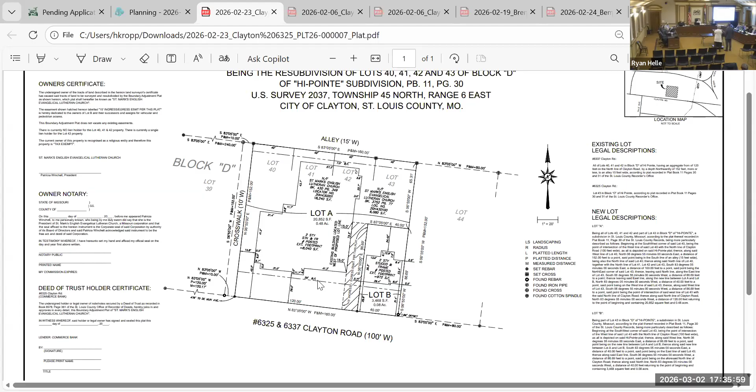Where in the driveway? So that is a very good question. The original plat, you can kind of see that it's laid out into 4 different lots. So the 3 lots would maintain the church and the property line would be right there in the division of lot 3 and 4. So it is more close to the actual residential property. Most of the driveway would be the responsibility of the church.

Okay, so looking at this scale and this reproduction, it was hard to tell exactly where that line is or will be. And the shared driveway agreement mentioned that there was driveway on each side. So thank you for the clarification.

Sounds good to me. Jim? I didn't really have any questions or concerns. I agree with you. I think it's a win-win for everyone, and I can understand why the property would be desirable. Chris? No comments. Blair? Also no comments. Jeff? Same, no comments.

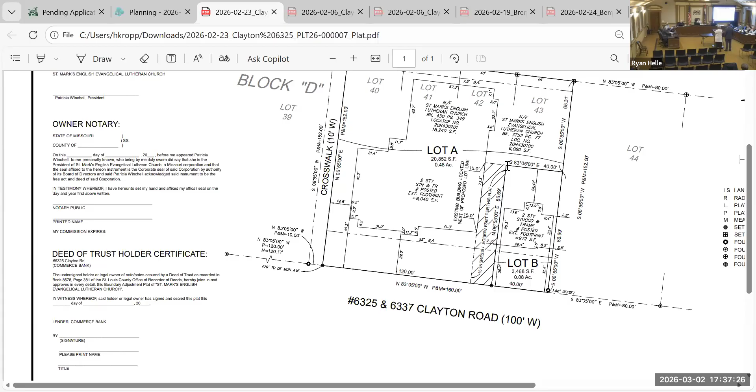Thank you. Okay, I need a motion. Oh, I'm sorry, I have Susan, no concerns, sorry. And also the public, is there anybody here who has a concern or would like to speak to it? And no one online has their hand raised, so no.

Okay, now I need a motion. I move to approve with staff conditions 1, 2, and 3. Second. All in favor? Aye. Aye. Opposed? I assume you have read the staff recommendations and you're agreeable to them. Yes. Okay, thank you, look forward to it.

Next on the agenda is 141 North Brentwood Boulevard, and it's the architectural review for fencing. Is there a representative from the owner? Okay, before you introduce yourself, Hobie.

The subject property is located at the northwest corner of the intersection of Brentwood and Westmoreland. The property is zoned R2, is in the Clayton Gardens Urban Design District, and is developed with a single-family house. The applicant is seeking approval for exterior alterations, including the addition of a new fence located in a front yard. There's an existing patio with a surrounding wall located on the east side of the house in the front yard along Brentwood. The paving would be removed and replaced with grass.

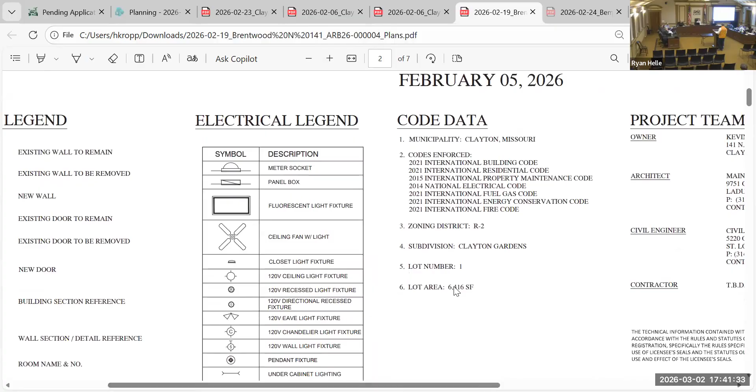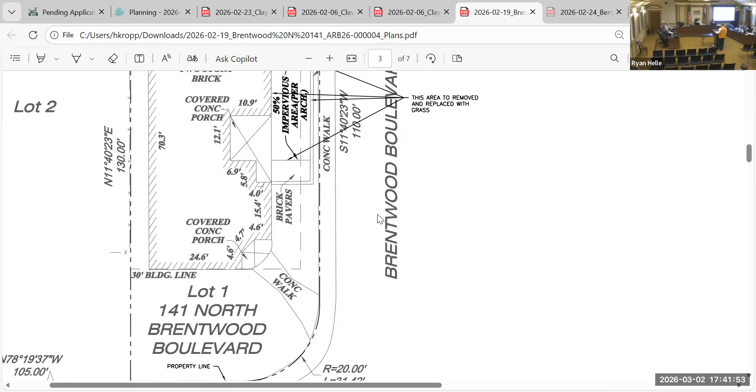Okay, thank you, I like your attention to details. The setback appears to be identical to the masonry wall that exists. And the 1.5 feet, you've maintained that off of the easement, which you can build right up to an easement. You can build on it, but you risk having to remove it if the easement is claimed.

That, and picking up the vocabulary of the neighbor's fence with the brick piers and the wood, I really like that. Will you be able to match the brick of the house? We're going to try our very best. We don't have any samples yet, but we're going to try. Certainly, it's our goal. Okay.

Yeah, it is away from it. It's not right next to it. Right. So you have a little bit of latitude. Right, I mean, it's sort of a pinkish brick. It's not, let's just say it's atypical, but we're going to try our very best. So, okay, Jim? Yeah, I echo Helen's comments and the staff comments that are in the staff report. I think the part that's facing the street is minimal.

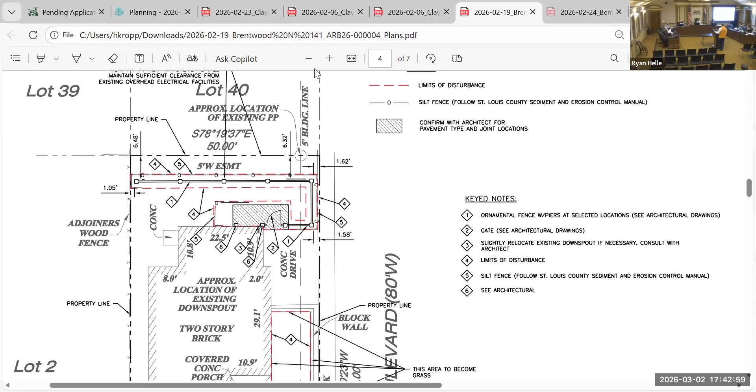And I think it's well done, so I don't have any problems with it. Chris?

So I'm familiar with this. I live in Clayton Gardens, and I'm very familiar with this lot and the work that the owners have done since moving in fairly recently, which is very nice. I couldn't quite visualize.

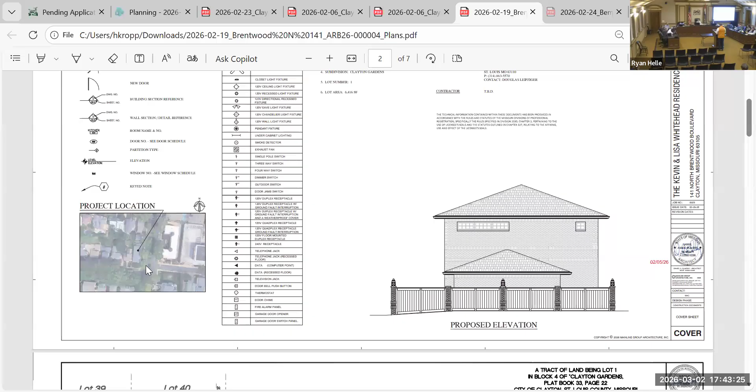They've done some very nice plantings along Brentwood, and it seems like there's the patio area there. What I can't visualize is why they're replacing that section, which seems to come out almost all the way to the sidewalk. We had to be very, very careful with our impervious surface area here.

And the owners hired a civil engineer who was very methodical and very careful about his calculations. And we had to sort of make some sacrifices along the way. And that was one of the sacrifices.

So even the dimensions of the piers and the top of the fence itself, we would have liked something even a little bit more robust, like the neighbor to the north. Their fence is a little bit more substantial, but at the end of the day, everything here is really sort of modified to meet the impervious surface threshold.

Okay. Yeah, I really don't have any concerns with it. I think that they've shown to be good neighbors in a way, in the sense that they've built up the landscaping. So I tend to not really like when you're closing off more with the fences in a walkable sort of neighborhood like Clayton Gardens.

But in this case, I think that there has been a lot of attention paid to the design of it. And I can understand how it would be used as a glorified dog run as such. So I don't have any concerns about it.

I think the owners are planning on doing a fairly nice planting screen in front of the fence, something that's compatible with what they have over at their little entry patio. Okay, so.

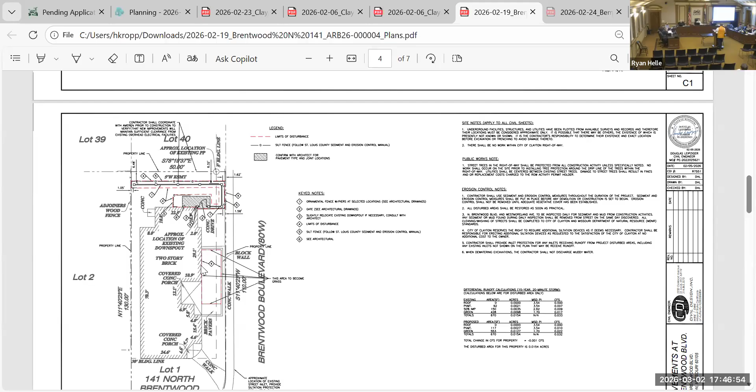That would be my only comment, was that I wish we weren't building that tall a fence that close to the right of way.

Yeah, if you scroll down a little more, I think there's a photo of the neighbor's fence. There, no, the one with the pillars on it, to the north, the neighbor to the north.

Yeah, it's on sheet A 2.1. It's the third exhibit. Yeah, exactly. Drawing 3 on A 2.1.

I think that we're trying to be consistent with that. I mean, there is a power pole that is just in the wrong place. And we wanted to enclose a lot more area than we're applying for here.

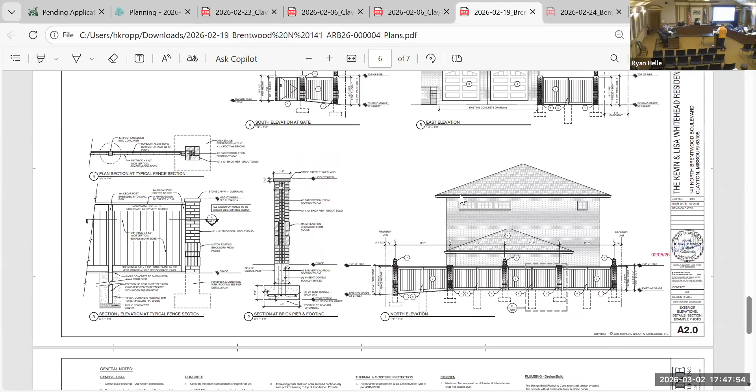The power pole really does limit a lot. And we wanted to avoid building in the easement, and Ameren could come along at any point, which they probably will, and want to do some work on it.

So, but I think that their fence is probably somewhat compatible in terms of the frontage with our proposed new fence. Just so everybody's clear, the fence is so similar it would feel nice as a pair if they were set back the same distance, as opposed to this plan, where it'll come out within about 1.5 feet of the property line, between the power pole and the sidewalk.

It's not a deal breaker, but I wish it was set back a bit. Correct me if I'm wrong, but based on C2, it seemed it was going to be almost even with the existing patio to the south. Yes, it is in front, and it is close - it's a 6 foot fence, not a shorter one, so yes, it is close.

Susan: I would agree with Jeff's comments. It's a tall fence and it's very close to the sidewalk. Having just driven by there - I don't live in the area, but I spend time over there with friends, homecoming parades and things like that - the more walkable our cities can be with sidewalks, and 6 feet that close to the sidewalk did concern me.

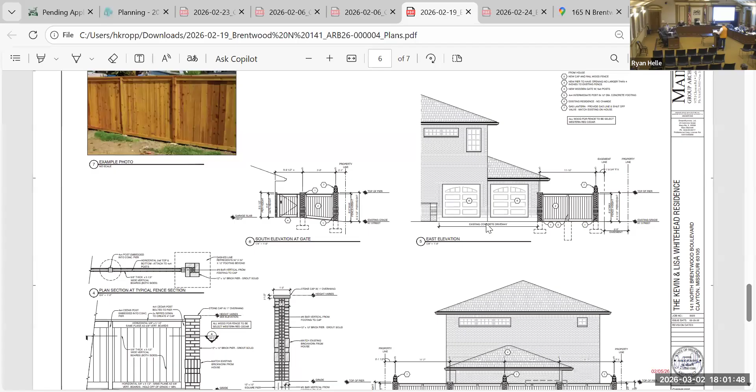I think at this point it's just for a motion as far as whether we approve with changes or continue to a future meeting. It could possibly benefit you if we continue to a future meeting, so you can check the measurements, and we don't put a measurement in that you then go back and lose something. I think largely everyone's on the same page, but since we don't have an exact measurement, that might just preserve the design.

That sounds good, why don't we do that? May I have a motion? I move to continue this to a future meeting agreed upon by the city and the applicant. Second. All in favor? Aye. Opposed? The motion carries.

We will see you when it works for you. When is the next ARB?

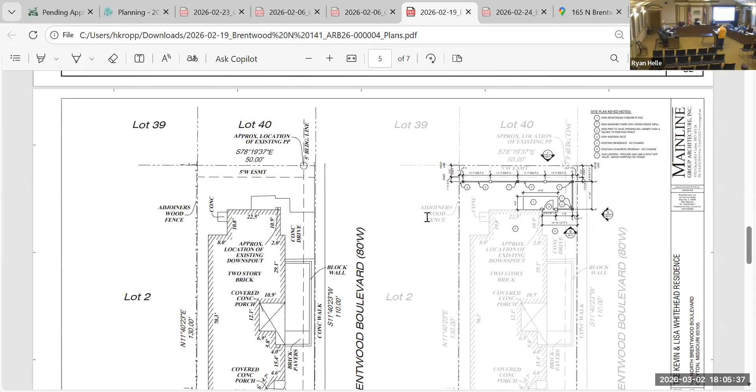Okay, thank you very much. We look forward to seeing you on March 16th, or the following meeting two weeks after that.

Next on the agenda is 224 North Bemiston Avenue, site plan review for an accessory structure. Is there a representative for the project present?

The subject property is on the east side of Bemiston between Pershing and Kingsbury. It's zoned R3 and is developed with a house, duplex, and two detached garages. The property formerly consisted of two parcels approved for consolidation on December 1st, with the condition that the applicant apply to demolish the duplex within six months of council approval. The project consists of demolition of the duplex and northern garage and construction of a residential addition and exterior alterations. The addition would include a garage and sports court connected to the house via a breezeway. A new pool and patio would be located in the rear yard. Surrounding properties include single and multifamily structures. The project would result in lower density than most R3 lots, but meets the requirements of the district.

We are seeking to build an underground sport court. By placing that underground, we are reducing the overall massing that a structure like that would require. Adding a 3-car garage with a link between to make a nice parking court is part of the strategy.

We have our civil engineer online joining us via Zoom if anyone has questions about meeting the right equation for the planting of native species. Our landscape architect, Ted Spade with SWT, has suggested if we just remove one European hornbeam from the count, that puts us at 34 native species, which puts us over the line with a very minor correction that can be caught up with the building application.

Okay, I like what you are proposing, but not seeing the drainage areas concerns me. Could you explain the site drainage, or will Mr. Wagoner do it? I will leave that to Mr. Wagoner.

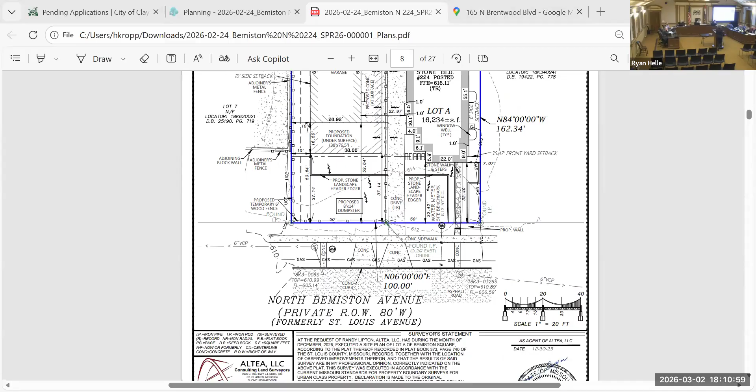Thank you. Looking at the plan, C 1.0, I see 4 pop-up emitters, 2 at the front and 2 at the rear. I'm also wondering if there are any dry wells that will be with those pop-ups. Mr. Wagoner?

Yes, I'm here. Can you hear me? Yes, hi, good evening. I'll start with the existing drainage patterns on the property. I've worked on some drainage area maps, not being presented tonight, but the property does roughly split: about half goes to the rear yard, the other half drains to the front. So the existing drainage patterns don't show runoff running to the sides of the properties toward the neighboring house foundations.

Regarding the structure we're taking down, I understand the downspouts go underground with no outlets daylighting on the property. It's my suspicion those roof drain pipes are routing out to the sanitary line, which was common practice 80, 100 years ago. MSD has indicated that the sanitary main is surcharging, so it's my suspicion those downspout drains are going out to the sanitary main.

As part of our proposed design, we are routing the new roof downspouts as you stated. There are 2 going to the rear yard and 2 routed to the front yard, so we're roughly splitting the roof area between the rear and front yard in an effort to maintain those drainage patterns and keep the property roughly split 50-50.

We're also picking up driveway and surface drainage in a channel drain and routing that out to the front yard, which is the same direction the existing pavement drains in that area. So from our efforts, we're trying to follow the same patterns to route water to the rear yard and to the street as it does today.

Using the pop-up emitters, we're allowing for more infiltration than exists today, with the roof drains likely being connected to the sanitary main. Regarding where water routes out to the street, to the north along North Bemiston there's a curb inlet at the corner, so any street drainage eventually ends up in that curb inlet and then into the storm main.

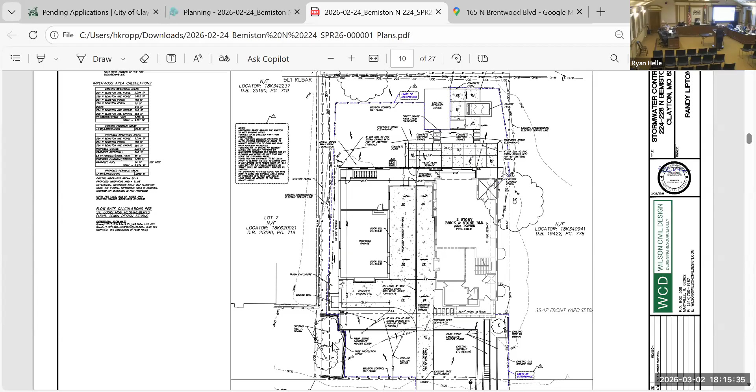There will be a sump in the lower level of the sport court, at the sport court level. I don't know what the groundwater is; we won't know until we open up the earth to see that. Wilson, can you respond to that question? I'm also not aware of the exact groundwater depth, so I'm not able to respond to that specifically.

Can you walk me through where the sump pump connects to and how that directs out?

Susan, where's the location of the sump pump? The sump pump is in the northwest corner, approximately where the cursor will be, inside the sport court area. Does the plan show where that then pipes out to outside the house? No, it does not. That's something I would like to see in the future too, along with the drainage patterns and calculations.

I think all that, just a little more robust data, would help aid us in making a decision.

We have an engineer who has raised her hand whenever that's appropriate.

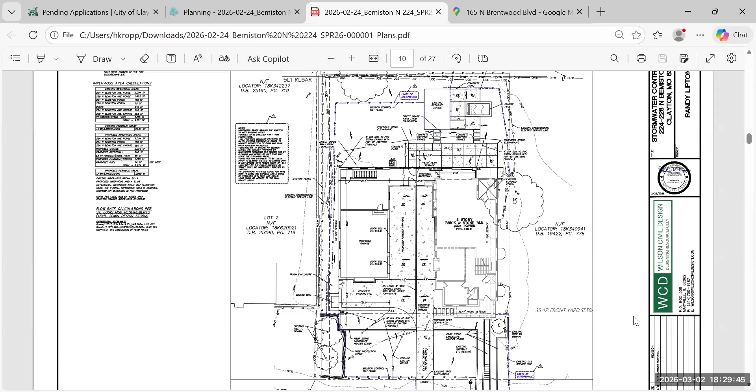This is Wilson. We're releasing the water from the pop-up emitters at least 10 feet back from the sidewalk, so there is a grass area to serve as a buffer. I'm showing 12 and a half feet from the nearest pop-up to the sidewalk.

And will that be enough grass to keep water from ending up on the front sidewalk? Water will run off, not just from pop-up emitters, but grass areas also have runoff. So it's impossible to completely stop water unless you have a berm or some sort of barrier to catch it before it goes across the sidewalk.

So just from the yard in general, there's going to be some surface drainage from the entire front yard that goes across the sidewalk. I've seen numerous occasions where in weather like today, you could end up with ice on the sidewalk - it's kind of a safety issue. We are trying to avoid concentrated flow going to the sidewalk, but like I said, it's not possible unless you have some sort of barrier at the property line.

Which is why I brought up landscape materials. I don't know if there's anything that can be done there with something other than lawn that will help keep the water where it's supposed to be. I'm not a landscape architect, so somebody else will have to answer that, but it'd be nice if we could.

And I think that's all I had from a plan standpoint. Okay, Susan.

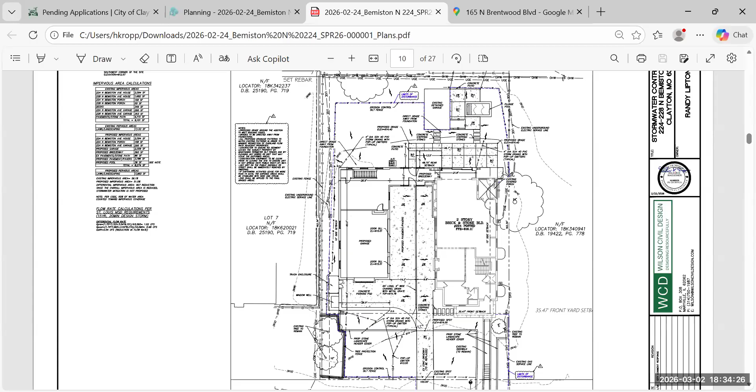I can definitely understand that and see that. But I also think it's going to raise the property value in the subdivision. This is going to be a pretty nice addition to the neighborhood here, so.

Okay, thank you. I think another thing that has just come to light is when you mention the sump pump, we've been concerned with the sump pump and with the depth you're going with the sports court - what is the water table? Maybe on the surface there's less runoff, but will the ground absorb it with that much below grade claimed for a sports court? And yes, the sump pump will work, but is that going to be a constant flow of water to the sidewalk, across the sidewalk, and into the street?

There have been instances on North Bemiston where there has been black ice from a sump pump. It's been corrected, but it existed for a number of years. So I think that's something else that needs to be looked at when you're looking at the drainage, and I think we're going to want to know more about that.

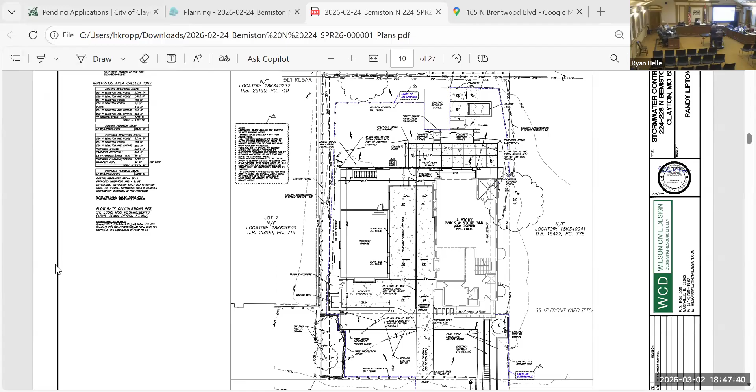Staff recommend approval as submitted. Thank you. Would you like to add anything? We have material samples for your review. Okay, can you hold them up so that we can see them? Or just tilt them?

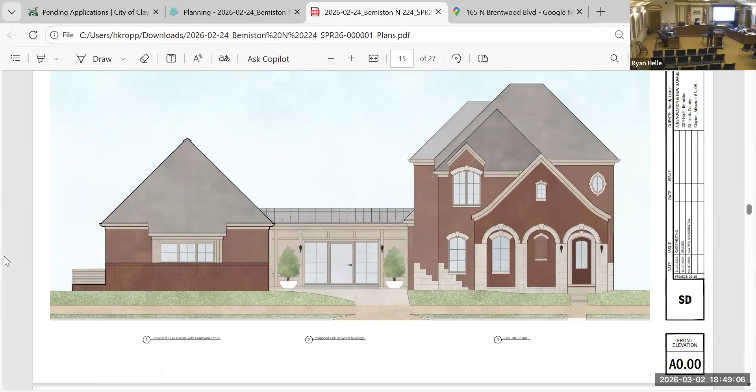Okay, I think, as others have said, you've handled the challenge of a sports court and a garage very well. And I like that you've made use of the existing garage, the one immediately behind the existing house. The roof on the garage - there's a lot of roof, seems really high. My first instinct would be to bring it down, but then looking at it with the existing house, it needs to be that. If it were anything else, it would look, I think, mundane, like a backyard garage. So I think you've met the challenges well.

My only question is, what is the height of the brick wall that is going to hide the open parking space at the front? It's 3 feet. Yes, ma'am, 3 feet. Okay, that concerns me. 3 feet will not hide many cars.